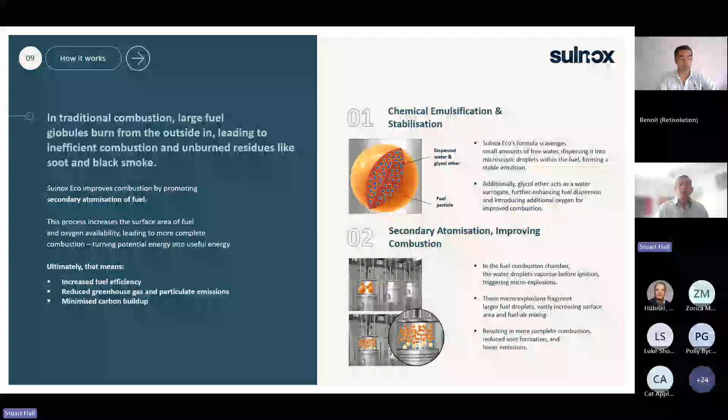So how does it work? Well, it starts with what's called secondary atomization. Secondary atomization is a process that's been understood since the late 1800s, early 1900s. It is not a Sulnox invention. It's something Sulnox takes advantage of. And it's a known fact that if you can achieve secondary atomization, the fuel that you buy will burn better.

Diesel burns from the outside in and burns inefficiently. That's why we get black soot, because it's just not completely burnt. What Sulnox is doing is actually looking to make that burn better, and it does that through this secondary atomization. So what is that?

That is actually what the chemistry is doing, is it's within the fuel and it's looking for any free water. Any water that's in your system, in your tanks, in your pipes, it's looking for that, and it scavenges very small quantities of that into the fuel. So what you end up with is lots and lots of tiny emulsified water droplets inside the fuel.

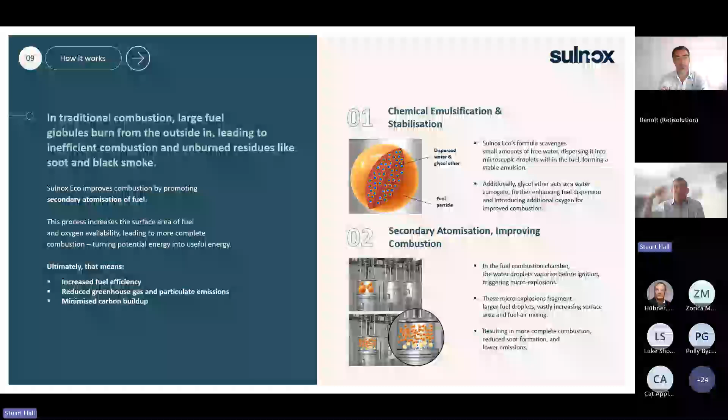Then as you go through the process and get to the combustion area, you get primary atomization as the fuel is injected into the combustion chamber. As the piston closes and the pressure and temperature rise, milliseconds before combustion, you get evaporation, and all those little globules of emulsified water burst out. That generates more and more tiny particles of fuel rather than a few big particles. Smaller particles, like on your barbecue, burn quicker.

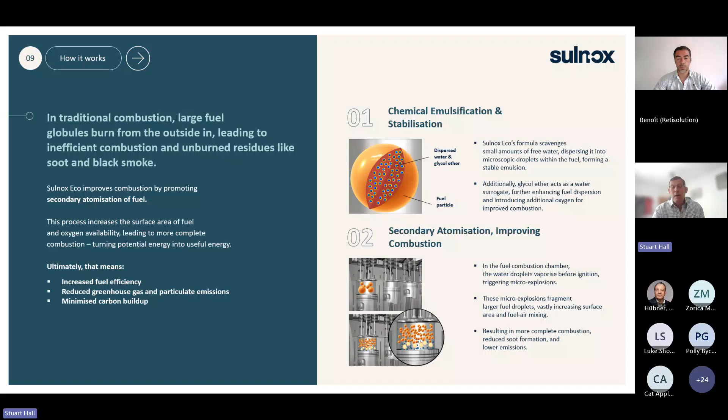So now you have the ability for the fuel to burn quicker. There's a greater surface area, a tiny extra amount of oxygen, but the beauty is these big globules of fuel are now small and they burn more completely. That is secondary atomization. Now, on top of this core element of the chemistry, we also add lubricity.

As we move down the road of more modern, cleaner fuels, lubricity is becoming more of an issue. We're doing a lot of work with HVO at the moment, because that is a drier fuel, so it brings benefits but also problems. Sulnox overcomes that by adding lubricity. In fact, Eastern Pacific have just done some tests on a low sulfur HVO, and that showed 22% additional lubricity.

Then on top of that is the added detergency. Sulnox is not an aggressive chemistry, it's a very gentle chemistry. But over the first few weeks, the first month or so of using the product, it cleans the components. It's not making the engine work better than it was designed to - it's making the engine be in a condition that allows it to operate at its most efficient. That's what Sulnox does, it keeps the engine parts clean, and we've got lots and lots of examples of that actually taking place.

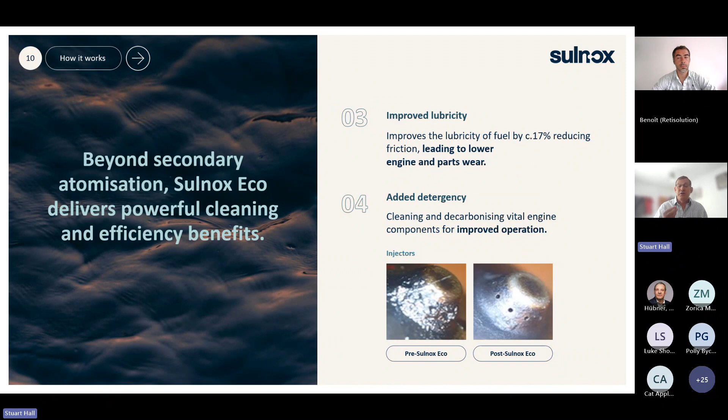Now, I keep talking about this word fuel conditioner, but we all know as engineers, it's an additive. So what is the difference between a traditional additive, the kind I put in my car 40 years ago when I was 17, when all I wanted was a bit more oomph? Traditional additives are certainly not biodegradable and not organic. They come from petroleum derived or metal based backgrounds, they have solvents in them, and they change the cetane - they make the engine burn hotter, which is why engine manufacturers don't like them.

What Sulnox does is the opposite. Sulnox is very organic, very gentle, totally biodegradable, and therefore does not change anything. Now, the key part to all of that is about fuel spec. A lot of traditional additives take fuel out of specification. What Sulnox does, it does whilst maintaining it in specification. It's been tested over and over again in all different market sectors to the relevant standards, and it shows repeatedly 100% of the time that if you add Sulnox into the fuel, it stays in specification.

Now, why does that matter? That's because the likes of your engine manufacturers, your insurance companies, your regulators, they all basically say that if you're going to use an additive or a fuel conditioner like Sulnox, the fuel has to stay in spec, or else you can affect warranties, you can affect your insurance. Sulnox keeps it in spec. That's why it's so important, and we are constantly testing against new standards.

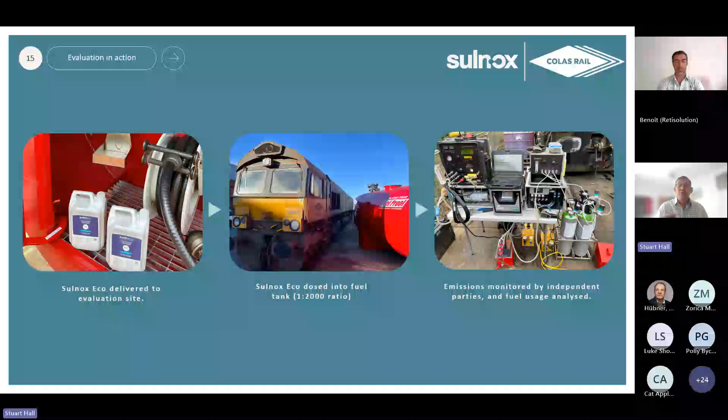What we then also had was emission monitoring. They didn't just check the fuel consumption, they checked the emission monitoring.

So to look at that in a bit more detail, what they actually did was they added the Sulnox into the fuel, into 22,500 litre fuel tanks. So it was properly mixed and consistent for the whole test.

There's this company called ATESTA, a UK independent analysis company doing the emission monitoring, and they also gave Sulnox every week the details of engine performance, weather conditions, load on the engine, etc. So there was a very detailed analysis taking place, and all that was shared back with Colas Rail.

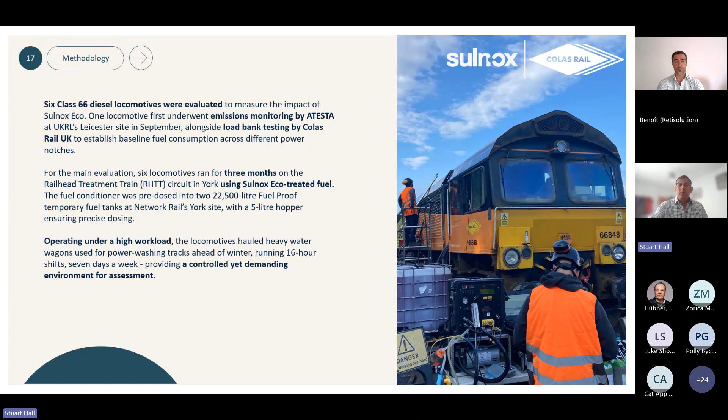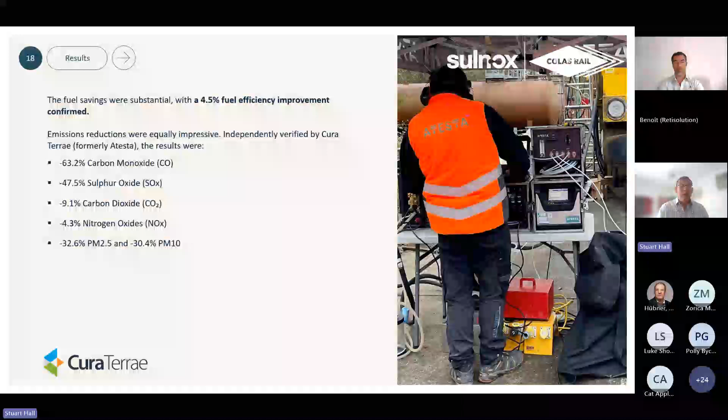Over that three months, they saw a 4.5% improvement in their consumption. That is what they saw as their average, actually higher than that in places. But more importantly, they saw the greenhouse gases come down, and they saw the particulate come down. And if the particulates come down, then you're burning more fuel.

That is secondary atomization in action, and that is what the operators reported. They did not see the black smoke like they were used to. So that is the key part here: the emissions have come down and the fuel improvement has gone up.

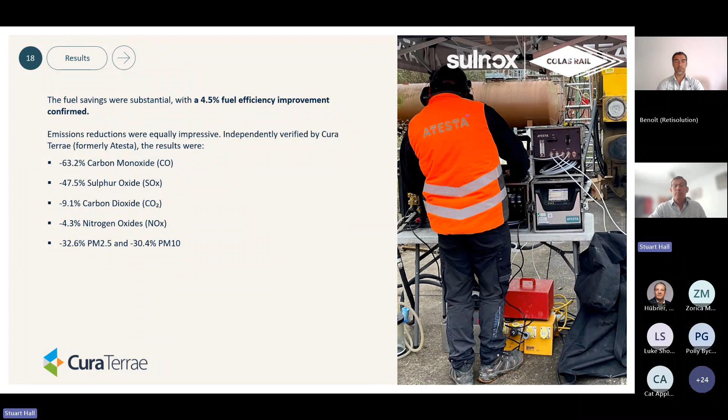So what that then leads to is a return on investment. If you look purely in commercial terms, that is then a return on investment. So you have the likes of Paul Conway, the head of engineering, who recommended to the board of Colas Rail that we should adopt. He was backed by Dan, the head of energy and carbon. Both these people put forward and backed the decision, and the board of Colas Rail have made that decision to adopt across the fleet, driven very much by the commercial aspects, the fuel saving, but then the added benefit of the emissions and the improvement in engine condition.

So that then has led to helping with their higher fuel costs. It's helping with the pressure they're under from local environmentalists on the emissions side of things. And it means their equipment is actually requiring less maintenance, staying in better condition, getting fewer breakdowns. All of these things is what they're reporting. So that is what Sulnox achieves through this secondary atomization, this improvement in lubricity, and the improvements in detergency. And it's very, very simple to apply.

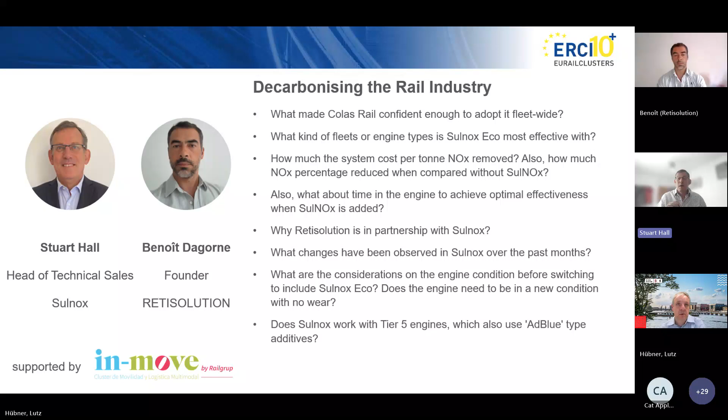Absolutely, it does. In fact, whilst we've not done any detailed analysis of this, the observations are that because we lower the greenhouse gases, particularly the NOx, the AdBlue consumption actually drops. We don't replace AdBlue, and we can't, because that's regulation. What we do see is that AdBlue consumption drops a little, purely because you're lowering the exhaust temperature, and that is what controls the consumption of AdBlue. So yes, it works with Tier 5 engines, and yes, it helps with your AdBlue consumption.

I have another question for you. What is the particulate matter that we suffer within the UK with diesel fleets? By how much can Sulnox reduce this using, for example, a Cummins or Perkins diesel fleet in operation on UK fleets, e.g. midlife fleets, about 20-plus years old? We have exhaust filter devices, hence the question.

It's observational, so please take that for what it is. But the observation we have, particularly in the UK, is that filter changes are extended. The time when the sensor comes up and says you need to change your filter actually gets extended. It's obvious, because if you've got less particulate going through, the filter won't block up as quickly.

So the safe return home mode, where a lorry goes into lower power mode to get you home, actually happens less. That's what gets reported back to us: the filters do not clog up as much, so that safe return home mode does not get instigated as often. So that is one of the add-on indirect benefits of Sulnox.

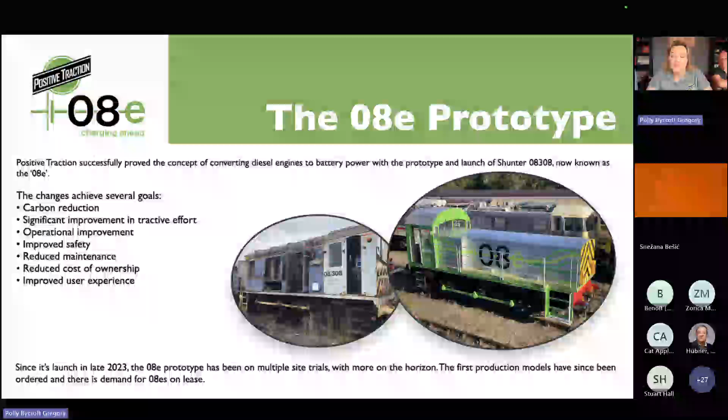It's been to Whatley Quarry in Somerset, which is an aggregates site well known for being particularly challenging - strong gradients, you need to pull a lot of weight, really tricky for shunters to operate. It actually ended up outperforming their diesel 08s that they had on site. It could pull more. So it kind of proves that it's an easy transition, but it adds a little bit of extra ability as well.

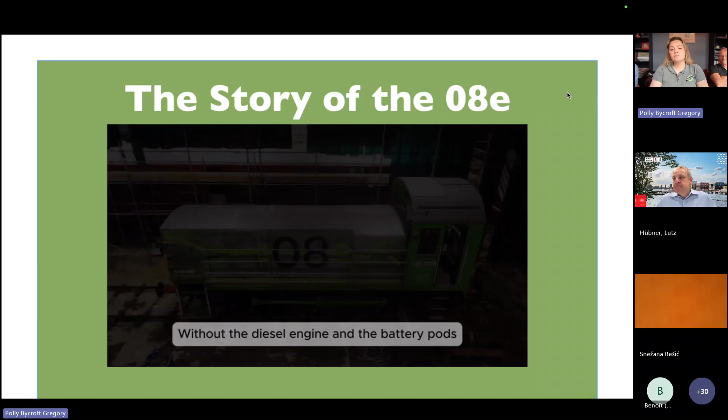But that's not all. We recognised the opportunity to not only upgrade the power source of the 08, but improve multiple elements for potential customers. Without the diesel engine and the battery pods not taking as much space, the bonnet was lowered to give 360-degree visibility. We also added walkways either side of the bonnet with guardrails for working at height.

Taking away the diesel engine also meant taking away a lot of weight, so we added 14 tons of carefully designed steel plate to ensure the overall weight stayed the same, as to not jeopardise the tractive effort or classification.

We replaced the bearings on the rods, which used to be prolific for dripping oil in depots, with self-lubricating and low-maintenance Vesconite. The 08E is not completely silent, but there is a lot less potential for noise pollution, which is ideal for depots in built-up areas.

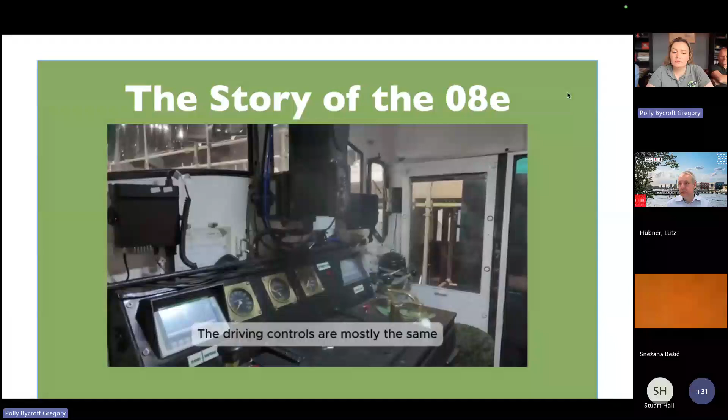We also gave the cab a little bit of a makeover. The driving controls are mostly the same, meaning retraining time is minimal, but we've made the space more comfortable for drivers, including adding HVAC. So why not just buy new?

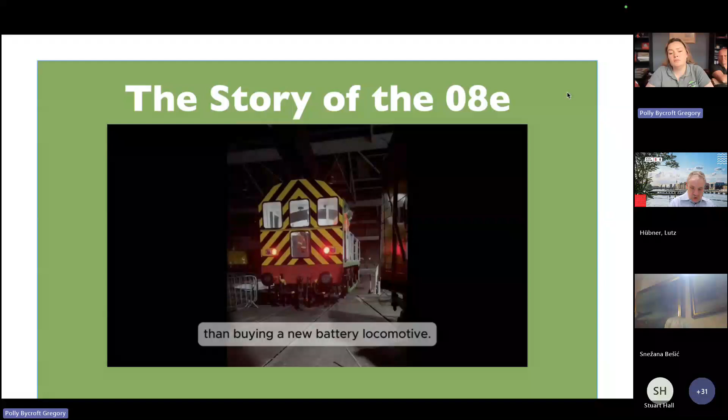The price of conversion is significantly less than buying a new battery locomotive. Lots of sites already have 08s they own and are unable to find replacement parts. Lots of sites have 08s and like how they operate, but are conscious of using diesel. Positive Traction are managing obsolescence and making shunter use as sustainable as possible, whilst still maintaining a part of British rail heritage.

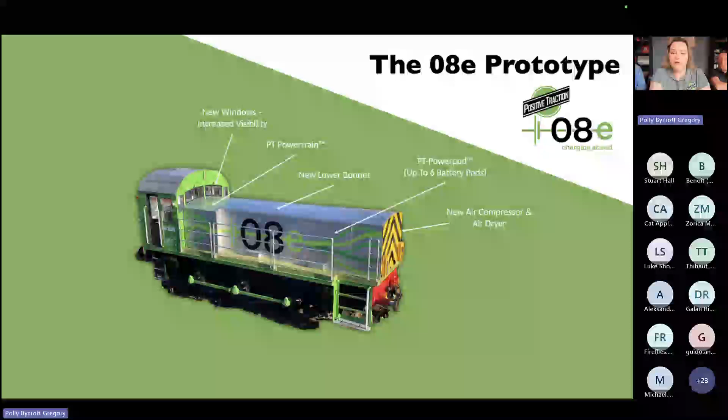And so the lower bonnet houses all the equipment, including the PT power pods, which are the power source, the batteries, and then there's a new air compressor and air dryer, and LED tail marker lights there.

I don't know if you saw on the video, we had to take away a lot of the weight, so we had to add 14 tons of steel plate onto the deck to make the 08 weigh the same as it did before, but it gave us the opportunity to level the deck out, so it's a really nice level surface to put all the equipment on, and it's all designed in a way that it fits together like a jigsaw. So if you ever did need to take it apart, it's all in bits rather than one massive chunk.

Existing traction motors and brakes are retained, with low maintenance Vesconite bearings. Tackling obsolescence as a whole, we were looking at all of the problems. The rod bearings used to drip oil all over depots, which is obviously a hazard, so we looked at a solution for that, and one of them is Vesconite, a South African company who create self-lubricating bearings.

So before traditional 08s, you wouldn't have any space to work at height around the bonnet. So we've added the walkway and the handrails for increased safety. An auxiliary converter is housed in there too. And then we also have windows at the back so that you can see both ways when you're driving.

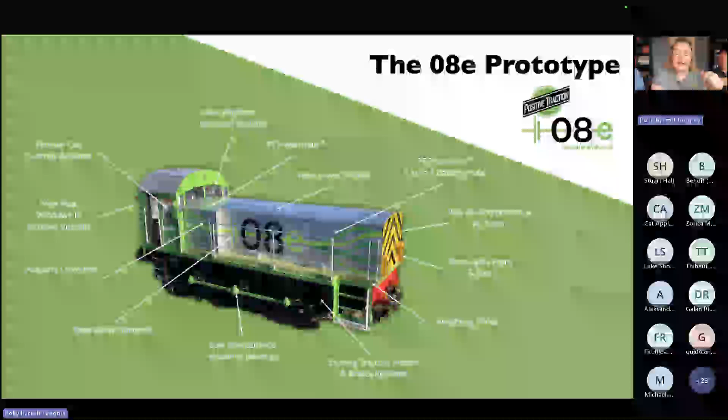We also have coupling cameras, this isn't on the diagram, and different cameras so that you can see where you're going as well. But yes, the driving controls in the cab are the same, so retraining is fast.

So not only are there benefits to the vehicle itself, but also the infrastructure associated to it and site benefits. There's no fuel storage costs, decreased risk of fuel leaks or anything like oil dripping onto depots, and driver retraining is minimal.

We've actually sent it to a few sites where I think the drivers were a bit hesitant. They were happy with the 08s, they didn't really want to try anything new. But then once they'd had a go, they were like, oh, actually, it's the same. It's just less noisy, and it starts up, and you don't have to leave it idling on site all day. They actually really liked it, especially because we put HVAC in there, so on particularly cold or particularly warm days, they'll be comfortable.

There's no reclassification or recertification needed because it retains its right as an 08. And we are managing obsolescence as a whole.

The power source is batteries, and the way that we've designed it on the 08 is to arrange them in power pods. The pods house the batteries and they are able to be charged on board the vehicle. We just use a regular 3-phase supply, but if you did have a fast charging point as part of your infrastructure, or are levelling up in terms of moving towards battery power on your depot, you can do that too. They are capable of that.

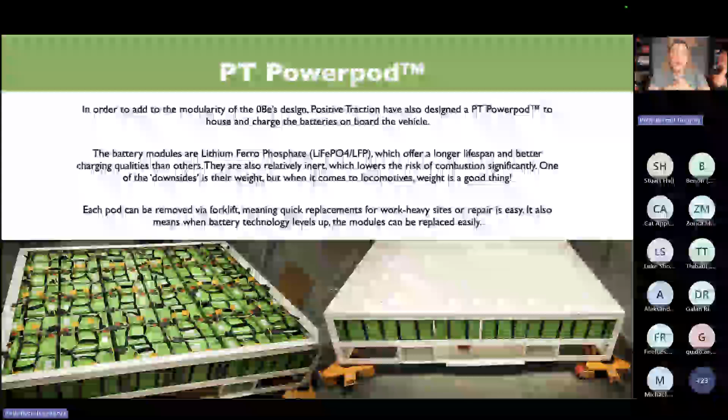They are lithium ferrophosphate, which have a longer lifespan and better charging qualities than some of the others. We chose them because they are relatively inert. A lot of people ask us early on, what's the risk of combustion, what happens if they set on fire? We hear these horror stories about EVs going up in flames, but we chose these because the risk of that is basically non-existent. They can catch fire in the same way that anything else could, but within themselves, they're stable.

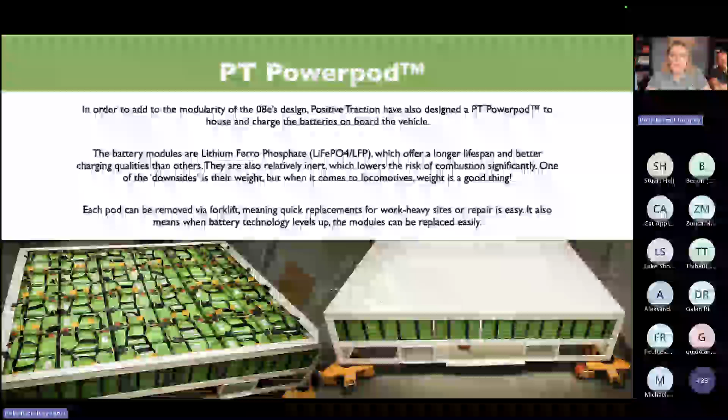So the downside of lithium ferrophosphate to an average consumer is that they're heavy, but for us that wasn't a problem because we ended up having to add more weight anyway, so that wasn't an issue for us.

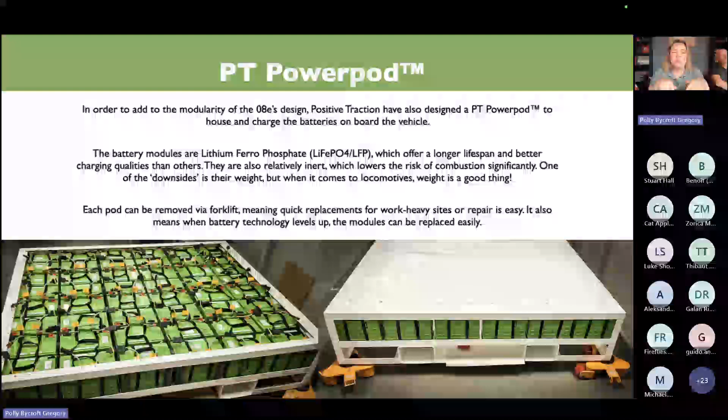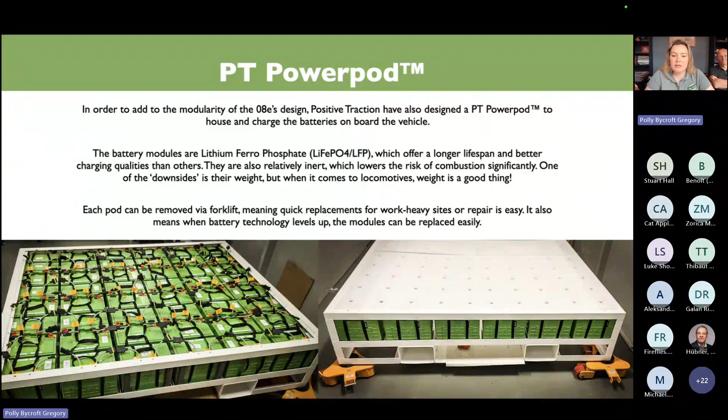Thinking about power pods as a replacement for the fuel tank, in an 08's case you can get up to 6 pods, which is 600 kilowatt hours, but that's just because of the envelope of space that's available. If you're looking at a bigger locomotive with a bigger space available, it can be whatever it is, it's just a vessel to be incorporated into whichever locomotive it is installed in.

So I'm just going to get my colleague Paul Riley to talk about the PT powertrain because he can talk about it in more detail than I can. Oh, okay. Hi, I'm Paul Riley, I'm the engineering director of Positive Traction.

And why is that important? It's because this is the bridge between the train driver and the traction motors. And the traction motors come in a large variety of different sizes and shapes and designs dependent on the duty, the age of the locomotive, the origin of manufacture, and so on. So we've tried to make the powertrain as universal as possible, providing the interface to whatever motor type is on the locomotive that we're converting.

Similarly, the driver controls also show a wide variety of design, again depending on the locomotive design, on the culture, on the country of origin. So we designed a common interface so that the driver interface remains the same - it's the same controls, they're in the same location, it has the same feel as the original locomotive.

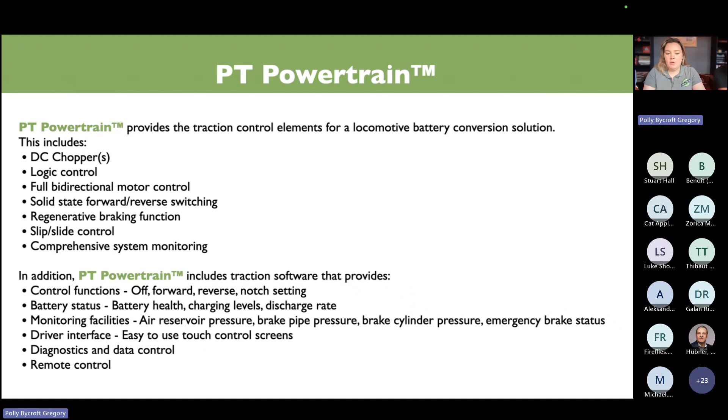Going off what Paul said, it's really important to remember that the 08E is just a proof of concept, and this can be applied to such a wide range of different applications. So I'm just going to get my other co-director, Alistair, to talk about that.

Hello. The main reason we kicked this project off in the first place was because we ended up with the elephant's graveyard of broken diesel locomotives and long lead time components to try and get them reactivated again. That's why we went down the road of a battery conversion. We looked at repowering with diesel and other options, but we decided that if we were going to put significant investment into these locomotives to keep them in service for another 10, 15, 20 years, re-engineering with diesel wasn't really the solution for that.

We have industrial locomotives as well as 08s and 09s, and we're already putting proposals together for customers that we lease locomotives to and customers that want their own locomotives converting, so the tech doesn't just apply to an 08. We're already putting proposals together in this country, but we're also conscious that there's a shortage of shunting locomotives in continental Europe, so we're looking at putting locomotives there as a positive.

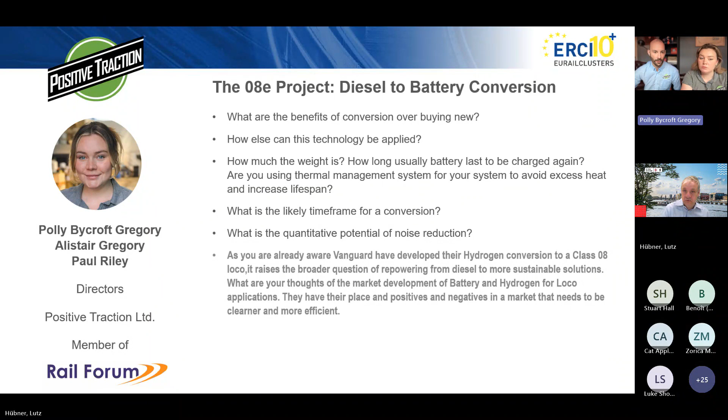When we were down at Whatley Quarry, we were basically going up and down their steepest gradient with the maximum loads available for trips into the quarry, and we were recharging it when it was in the yard of the railway. They move a carriage around, or take a locomotive to fuel, or assemble a train, and we probably charged it twice in 2 months, because when they weren't using it, they just switched it off.

When you plug it in to charge, it runs the auxiliary systems and the HVAC in the cab. Sometimes with the 08 shunters, they were running a 90-litre diesel engine just for that. With this, when you plug it in to charge, that three-phase supply takes a tap and keeps your cab warm or cool depending on what you want. So that was also quite good.

And there's a thermal management system - you really don't want to get to a point where the batteries overheat. The modules are air cooled, and the biggest issue we found was heating when they are charging. When the battery's being discharged or charged, natural heat is generated, and that's not an issue. But when you park it up for a couple of days and it's very cold - we found this at Barrow Hill Roundhouse in Chesterfield, which has its own microclimate, usually about 5 degrees less than anywhere else in England - when it was very cold, we struggled to commence charging. So there are heating mats in the pods; if your temperature is low, the heating pads will warm the modules to the point that charging can then take over.

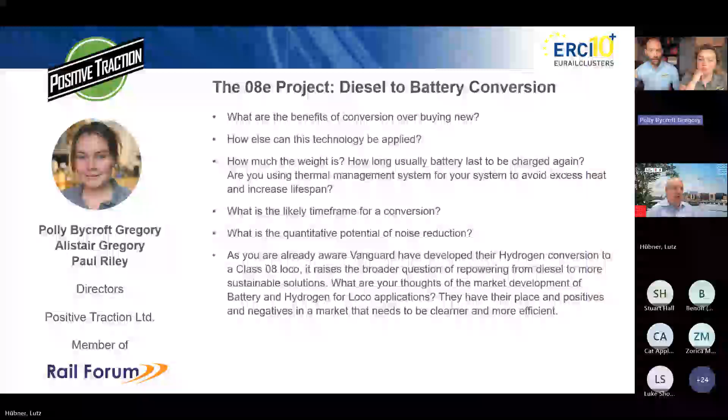What's the likely time frame for a conversion? For an 08, because it's a known entity for us, it's about 5 months. But with other things, it would have to be investigated because they would be new to us. So, depending on the condition of the locomotive, when you actually start the conversion, I think as an envelope it's 6 to 9 months for a mainline locomotive.

And that includes the test and commissioning. You mentioned the aspect of noise reduction. What is the quantitative potential of noise reduction, maybe in decibels?